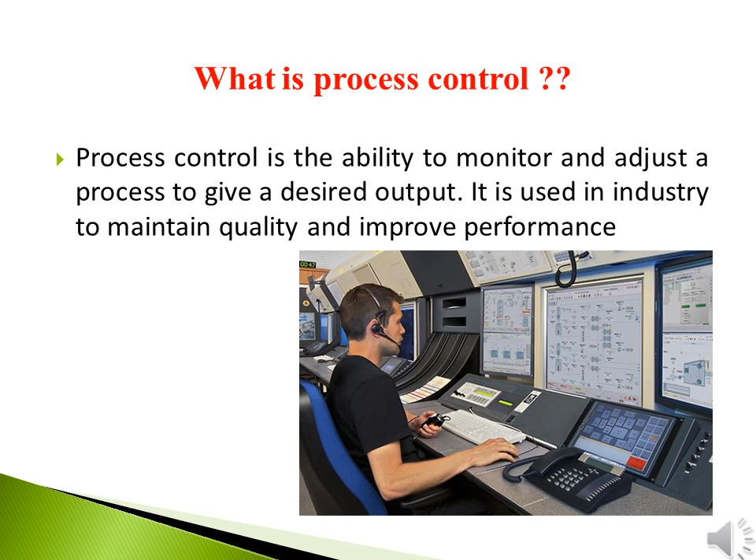Why process control? In almost all industries there is a process, but that process is usually not fully known. Certain uncertainty is there. The presence of this uncertainty and disturbances leads to the implementation of control systems in process industries.

One of the main classifications of control systems is open loop control systems and closed loop control systems. The first one is open loop control system. In an open loop control system, the output or the response of the process is independent of the controller action. Traffic signal, electric hand dryer, automatic washing machine, bread toaster, automatic tea or coffee maker, light switch. These are the examples of the open loop control system.

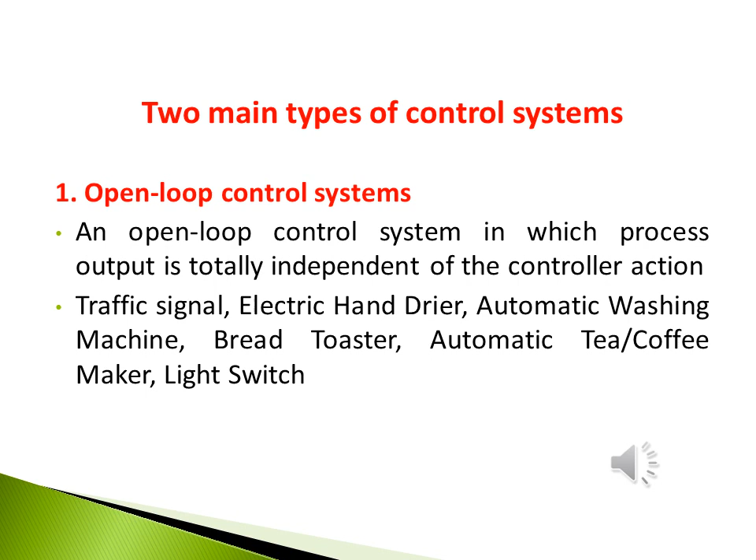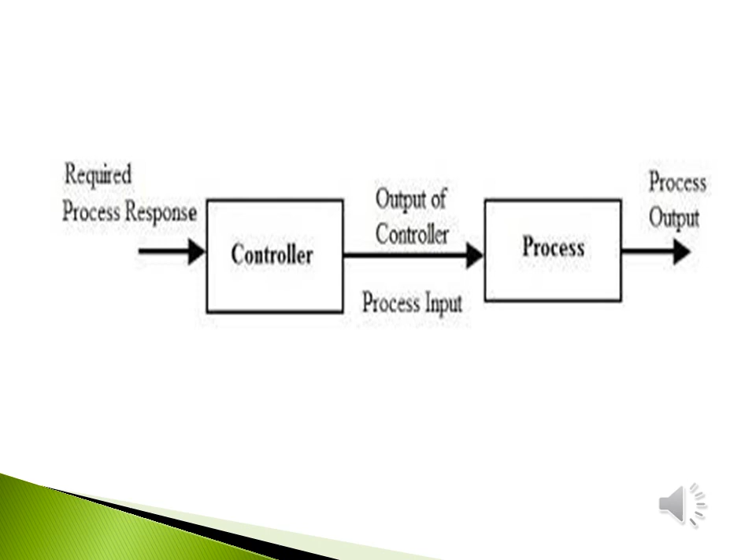This is the block diagram of open loop control system. In this block diagram, we can see that the process output or the response doesn't depend on controller action. That means the output from the process is not measured or not fed back to the input for comparison.

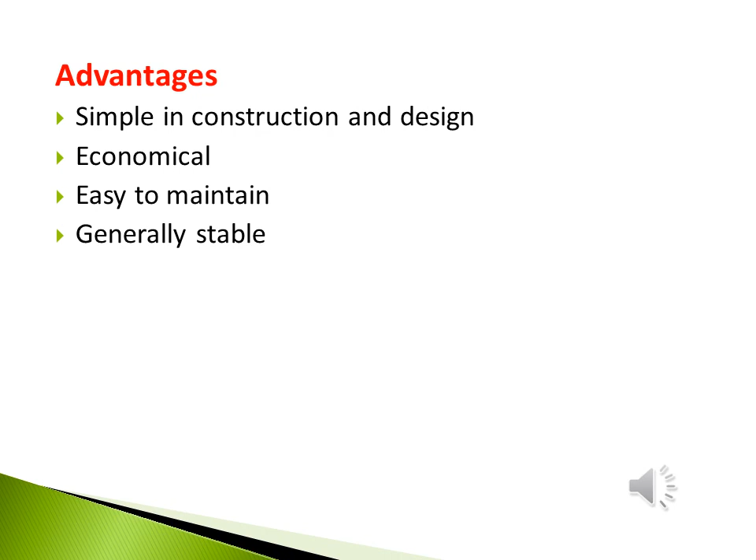These are the advantages of open loop control system. Its design and construction are very simple, it is economical, it is easy to maintain, and generally it is stable. These are some of the disadvantages of open loop control system. First, they are inaccurate; second, they are unreliable; and third, any change in output cannot be corrected automatically by using this open loop control system.

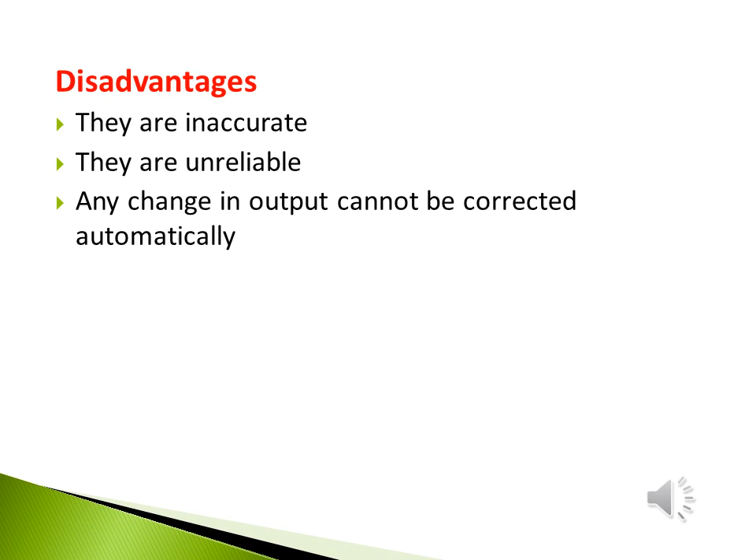So, in order to overcome these disadvantages, we can use closed loop control system. We can also convert an open loop control system into a closed loop control system by providing a feedback. We already discussed the main classification of control system. The second one is closed loop control system, in which the output or the response of the process depends on the controller action. Because in a closed loop control system we provide a feedback, it is also known as feedback control system.

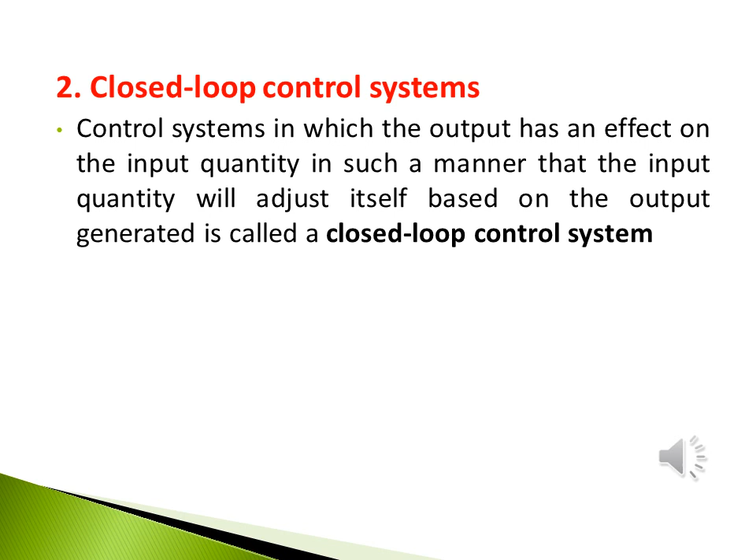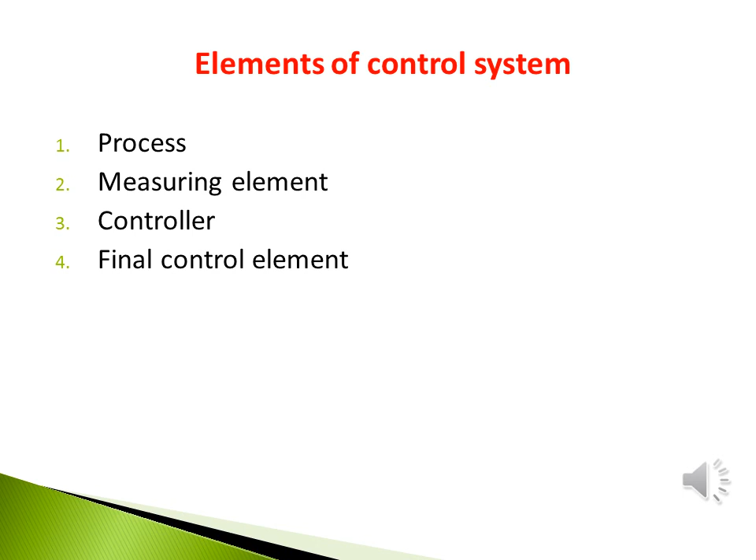Usually a process will have an input and a corresponding output. Once a disturbance or load is introduced into the system or process, we do not get our desired output. That means the output or response obtained from the process deviates from our desired value. At that time, the output value is measured by using the measuring element. Mostly we use a sensor as the measuring element. Suppose we want to control the temperature of a particular quantity of liquid; in that case, we use a thermocouple as the measuring element.

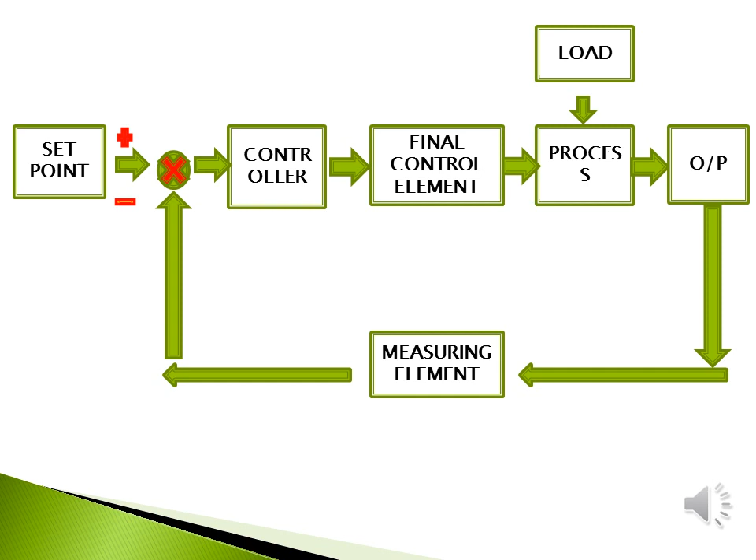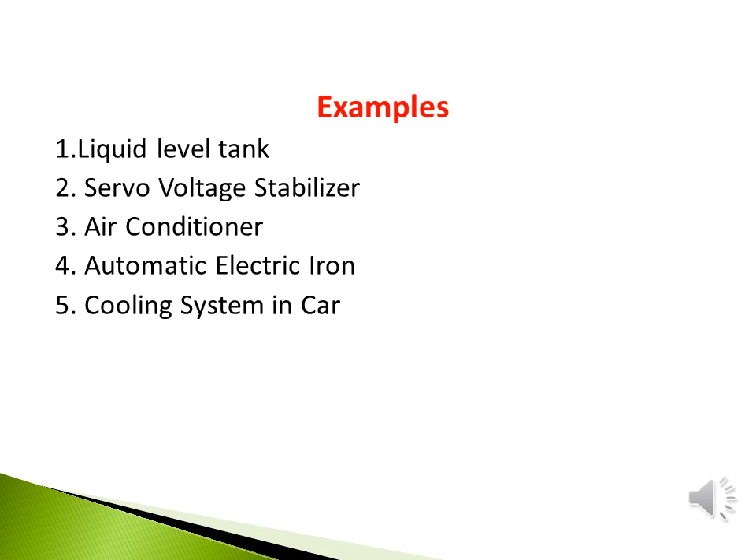These are some of the examples of closed loop control system. First one is liquid level tank, second one is servo voltage stabilizer, third one air conditioner, fourth one automatic electric iron and fifth one is cooling system in car.

Now we can see some of the advantages and disadvantages of closed loop control system. Advantages: it is highly accurate, as any error arising is corrected due to the presence of a feedback signal. Second, the bandwidth range is large. Third, it facilitates automation. And fourth, this system is less affected by noise.

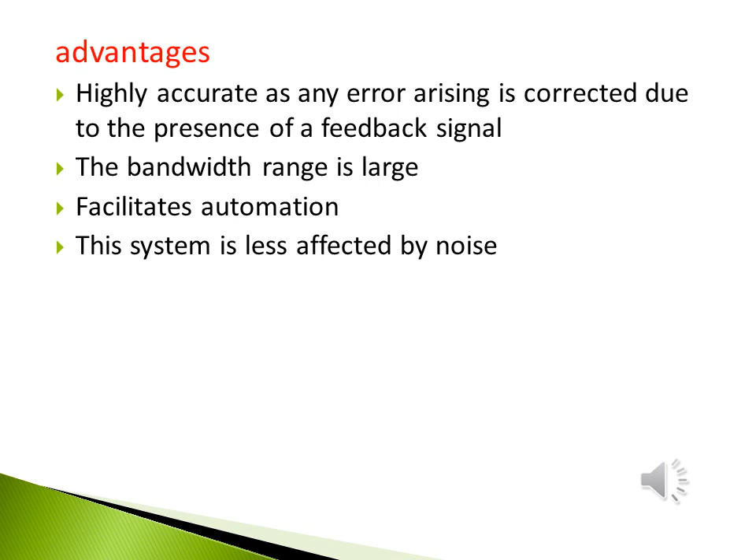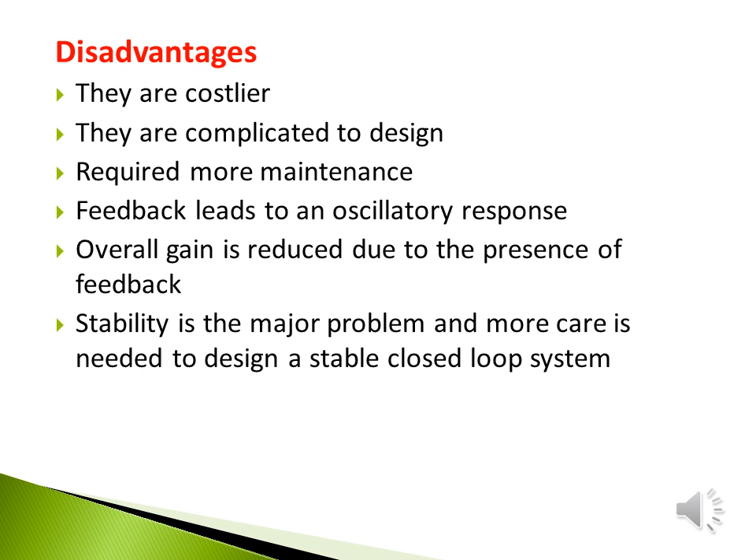These are the disadvantages of closed loop control system. First, they are costlier. Second, they are complicated to design. Third, they require more maintenance. Fourth, feedback leads to an oscillatory response. Fifth, overall gain is reduced due to the presence of feedback. And finally, stability is one of the major problems, so more care is needed to design a stable closed loop system. In order to overcome these disadvantages of closed loop control systems, we can use advanced control systems in process industries. Thank you.